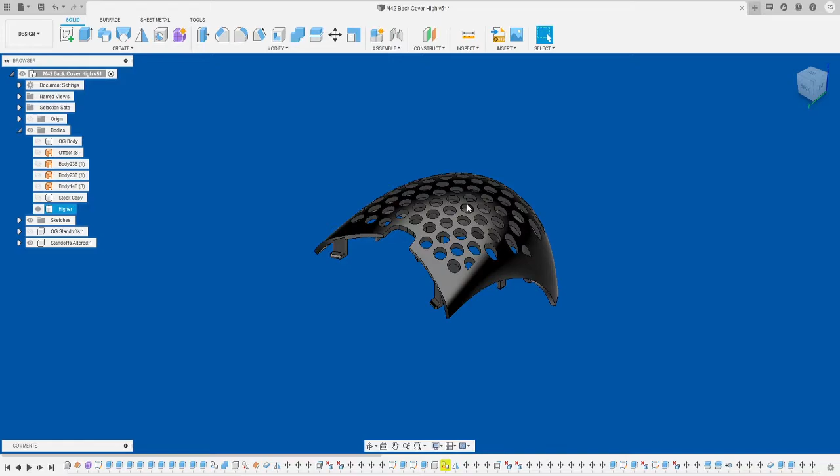All right, so I'm gonna do a quick voiceover about this altered M42 back cover file. See, the original looks like this - this is what the company gives you. This is for the higher one because I don't see a point to doing it to the lower one.

What's this? Okay, I don't know why that's there. It's like an artifact, weird. Whatever, ignore that.

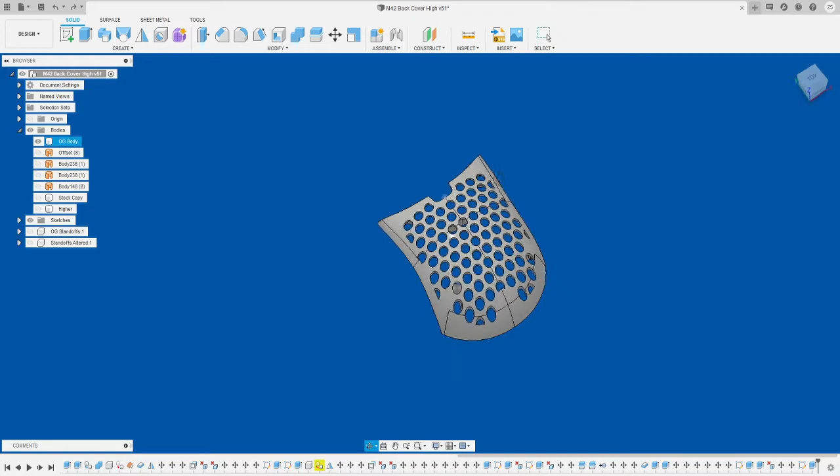Basically, I'm gonna leave these extra bodies in here in case they're useful. But I took the original file and attempted to make my own stock back that's pretty close, using form, obviously. You can find it by editing the form here, then it's body 11. I'm just going to leave it in here, even if you don't want to copy the exact back one, because why would you?

This is for solid. You can obviously put holes in it. You should find them as a hidden sketch here. I think I'll enable them, speed holes or something. Oh no, I didn't - here, we'll do speed holes.

So that way, if you want to take those out, they should only take out like a gram or, I don't know, maybe like 2, depending on how thick you make it.

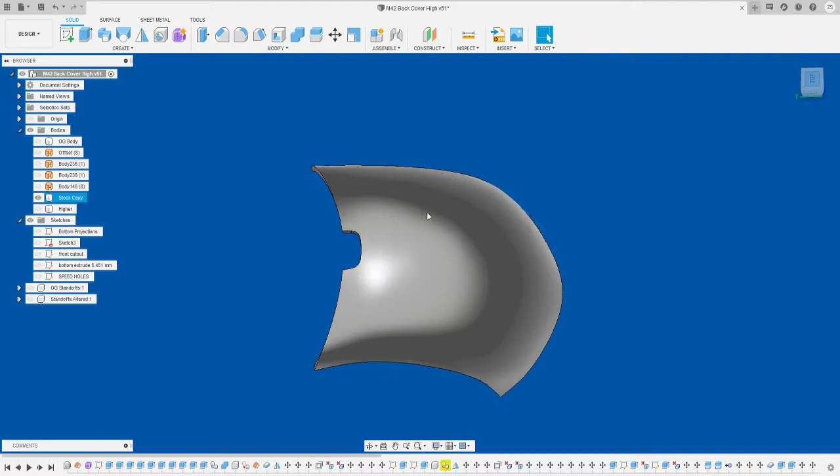But yeah, I just wanted an alteration to kind of give it a bigger butt. So like this, kind of not exactly like a ZA or something, but something more in that vein. You can see the original here to compare.

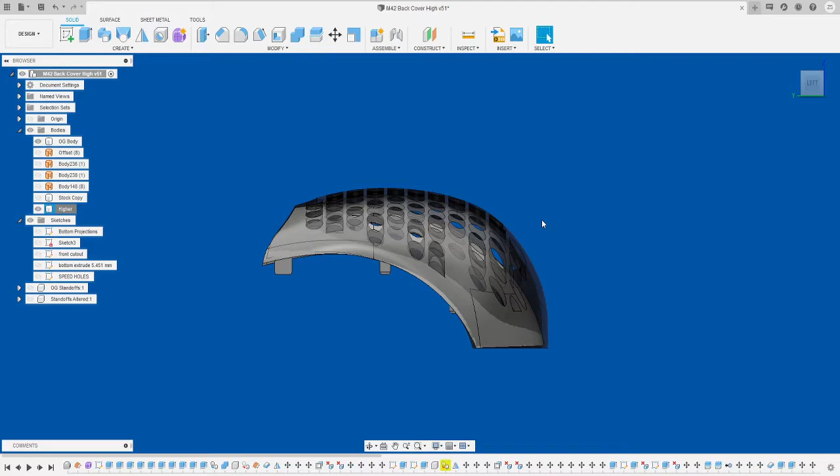So this opacity, can I set it here? Here, come on. There we go. So you can see it juts out a bit more at the back here.

That way you can just play with it a bit more. If you want to make my actual change, just go like this, hide body 12, and just start playing with it. I don't know, maybe you want to make it really tall. Obviously not quite like this, but you can always do that.

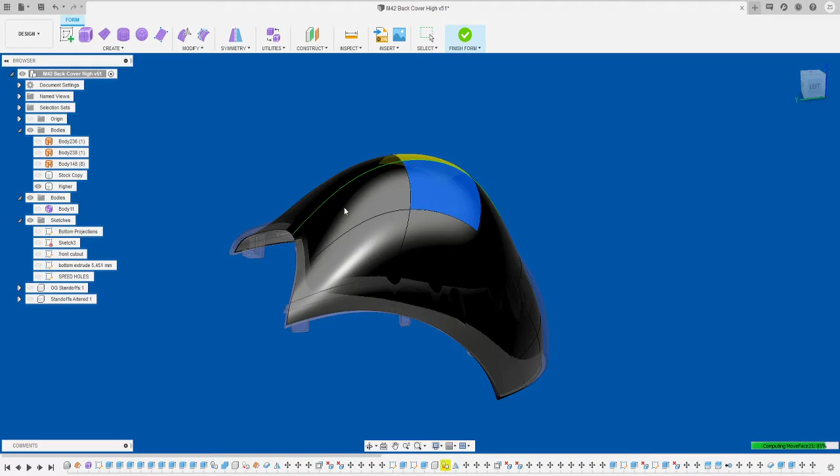And then just hit finish form and make sure it doesn't yell at you about any intersecting bodies or something, or vertices or whatever the folding stuff.

And this warning is gonna stay. I tried to go through and clear this, but I don't know - at some point I pasted something and I don't know. There's an error, but it all works fine. And when I delete it, something bad happens. Pretty sure.

I'm probably gonna skip ahead so you don't have to wait for this to compute. Or not, we'll see how long this takes.

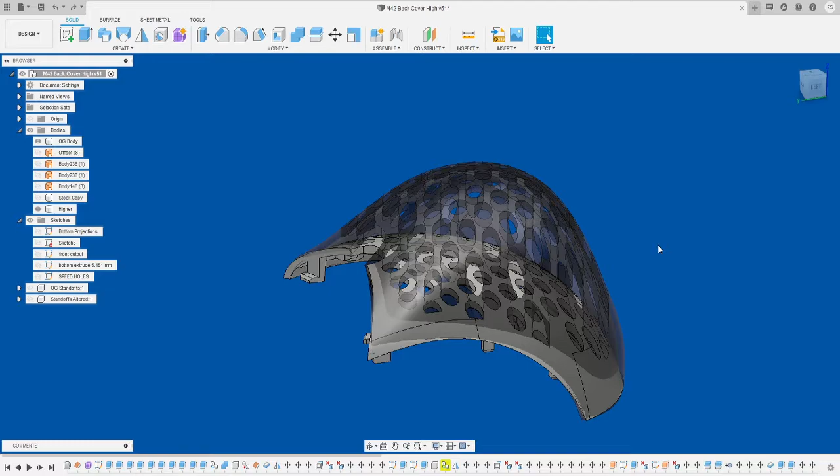Yeah, see, deletion causes downstream failures. So I'm just gonna leave that there. Obviously I don't have the tightest workflow of all time or anything, but a backup makes this not derp. But yeah, it could be useful to you.

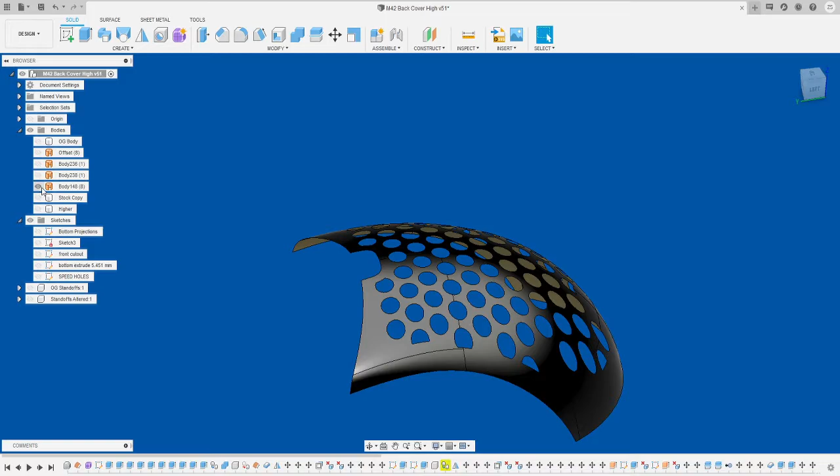So the way I have it separated is for the original bodies. I have the original body, obviously, OG body. Got this offset, which is just a surface offset here. I don't think it actually ended up being useful for me, but if you want that body to work with, it's there. And I just had a couple of previous shapes that, I don't know, I wasn't really happy with. Another one of these offsets.

This is the one that's pretty close to the stock one. Obviously, it's going to differ a little because I couldn't 100% copy the geometry. That's my shape, which has holes in it. If you want to get rid of those holes, look for speed holes down here and then suppress it. And then you can print this solid if you want.

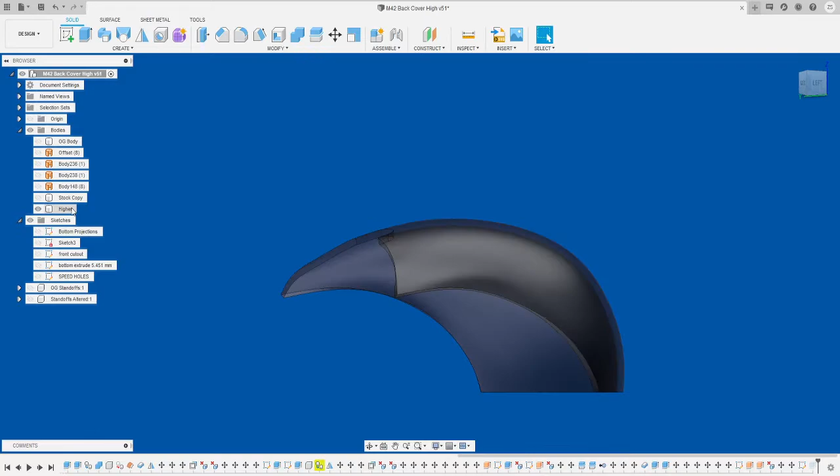I'm going to restore this opacity. Otherwise, I've got some of these projections here for when I was making, or not making, but like copying over the standoffs. I don't think these are that useful, these sketches.

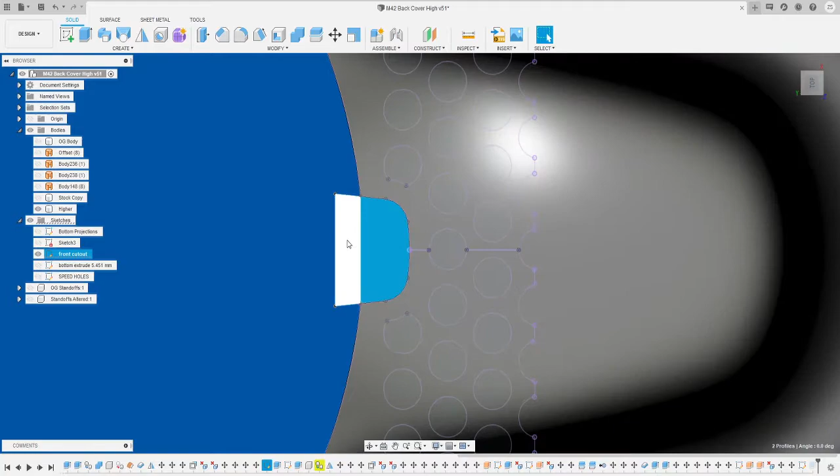You'll want to do this front cutout one here. You'll want to have this part extruded up, and then I have it going a bit in front just in case you design a shape that actually comes forward just a little. You'll want to cut that out because otherwise, if there's something here, you can't place it in the mouse. Bottom extrude, yeah, so go from here and then extrude up 5.451 millimeters as it says.

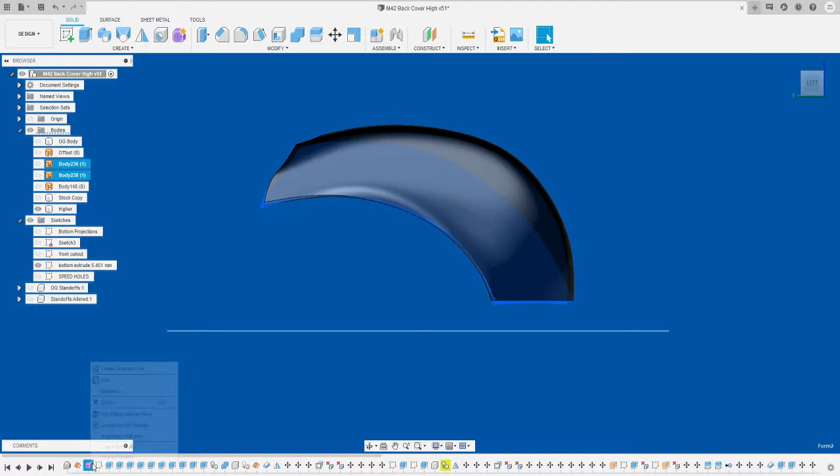And that's how you get the right height at the bottom, because you don't necessarily have to design your form in such a fashion that it's square. Like here, just go like this. Hide this, you'll see I have a curve down here - it actually goes down below where the body actually is. That's fine, just do a bottom extrude up, and then you can get the regular height. Or you can play around with the height if you want, obviously, but more power to you.

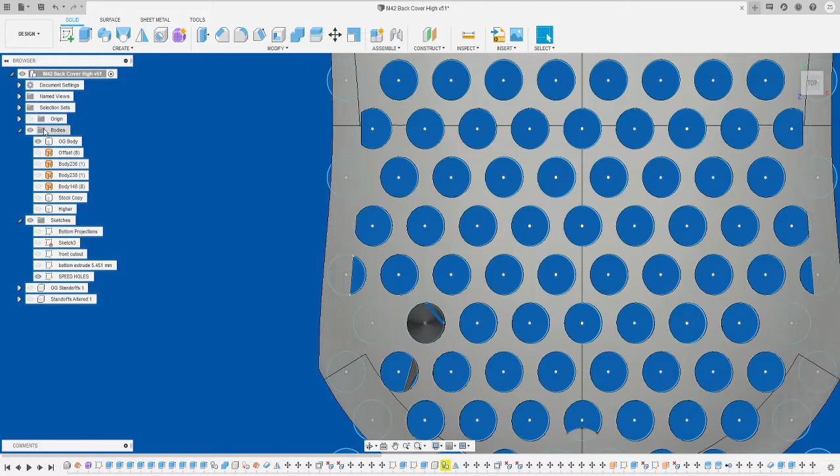These are just the holes if you want - I just copied their stock holes. If you see, let me hide this - you'll notice it's actually a little bit off. I think this file's not centered, like when they give it to us it's slightly off center, or asymmetric in the way that the left is like 0.1 or 2 millimeters bigger or something. So what I do is I just started with the center one and then build out from there. But obviously you can make them whatever shape you want.

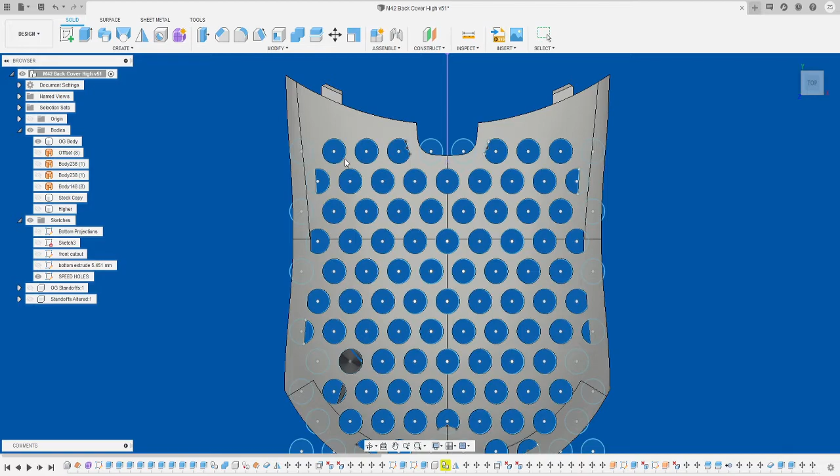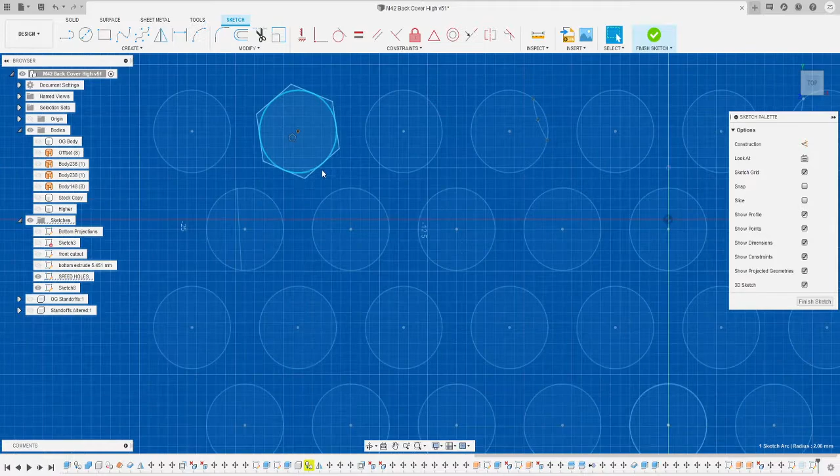You should do something like make a polygon here, like this. So you want to create like a 5-sider or something, 6-sider here. It's a 6-sider, you can't see. And then just rectangular pattern across, and then make a new one on this row, and then do it across, and then do each one down alternating. Like you would end up doing it like this. Obviously the direction is going to be a little messed up here because I didn't make it perpendicular.

But what I mean is go like this, skip this row - that way you can just keep the alignment the same. Or do it however you want. You could do a circle one here and then just revolve out or something. But yeah, that's if you don't want circles. If you want octagons, or I don't know, you can put your name in it or something.

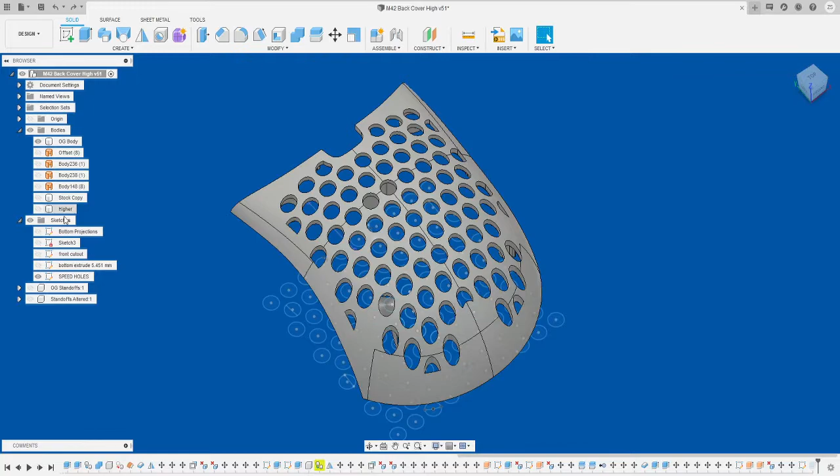Otherwise, I have the original standoffs - these are hidden, but this is where all of the originally modeled standoffs are, just in case you want to work with them. I altered them because they had to go a little taller, otherwise they're not going to connect to the bigger hump. The one thing to note here is there's a difference between...

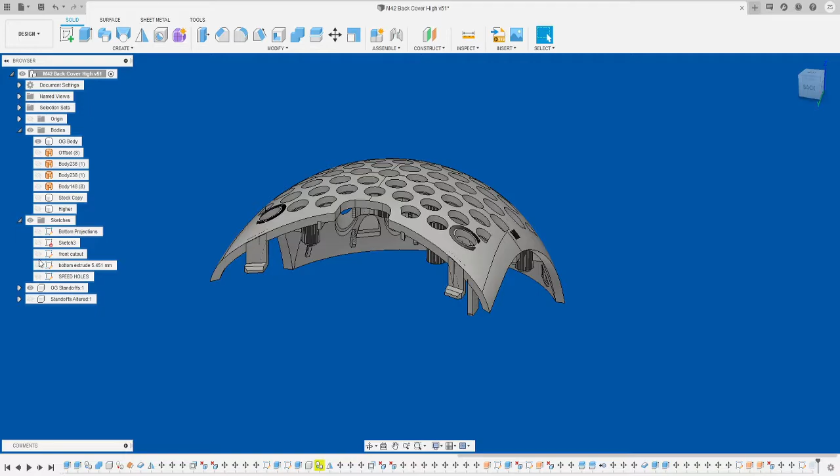Here, I'm going to enable this one, hide these. This left bit right here, which is on the file, this isn't in the real life base plate. For whatever reason, it's basically turned 90 degrees. If you were to take this and then rotate it 90 degrees, instead of like this, it's closer to this in real life.

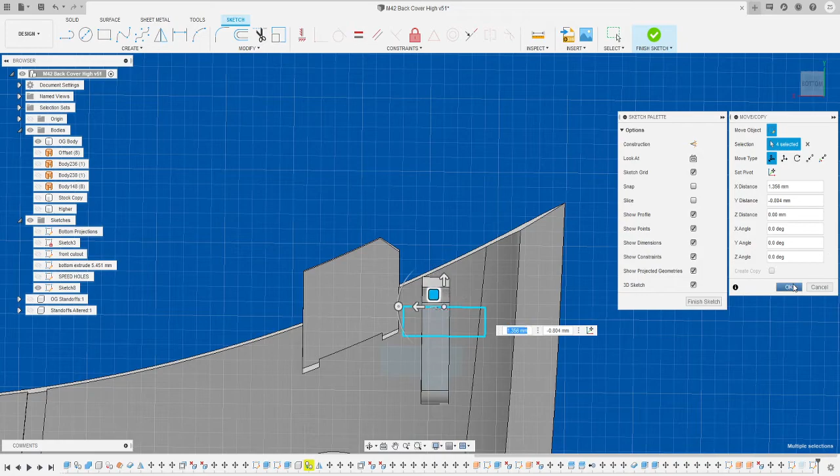It's obviously not the exact positioning, but it's something like that. But it doesn't really matter, you don't need it, so I don't know, it's just like a minor error. So for mine, you'll see that I actually don't have that modeled for my standoff copy.

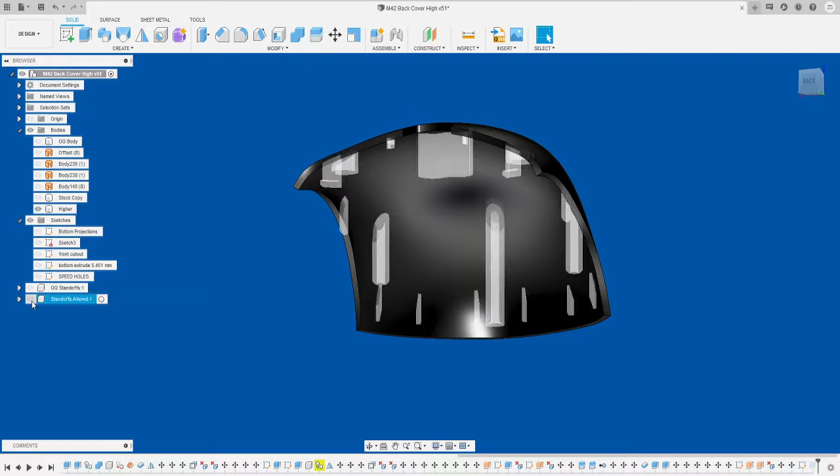But yeah, as you can see, this is just another copy of them. You could use the originals if you want, then just make sure you bring up, because otherwise you're going to have issues where you go like this. I'm going to activate the extrude - see how I go up and see how it's joining now? Here, if you can tell better from this angle, look at this gap right here.

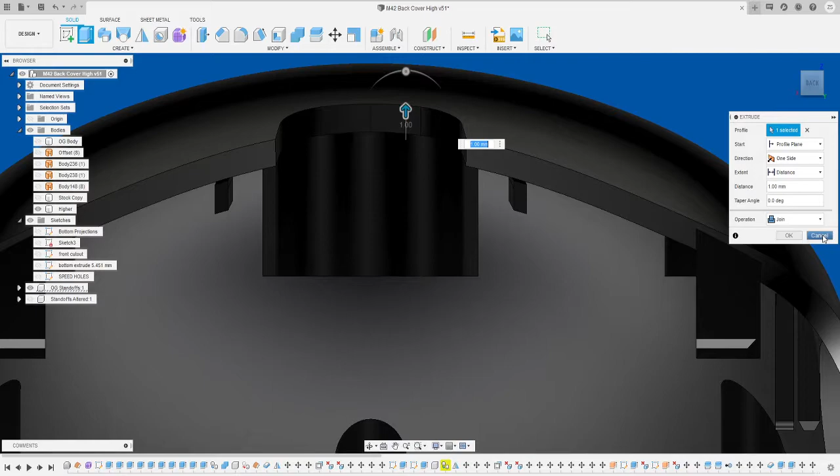You have to go up and join it up so there's no gap. But I'm obviously giving you the file in such a way that you can change the form. So I want you to be able to alter these without having to make them lower or something - you just have both to work from.

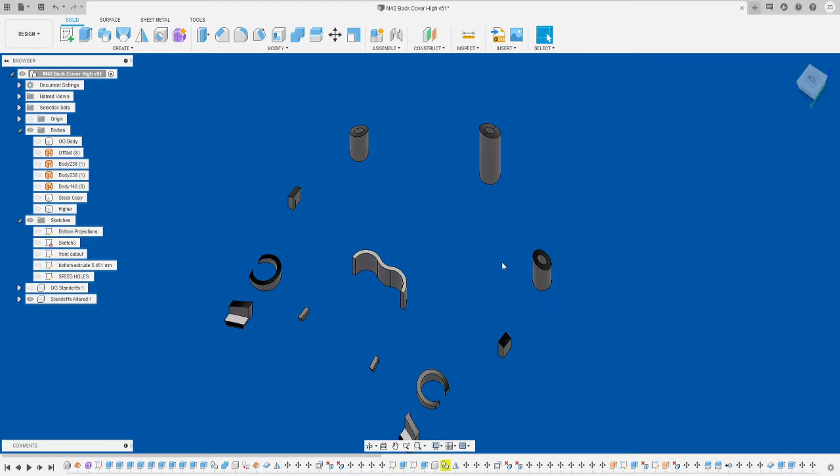And I think I removed the ribbings - yeah, these little ribbings right here, because they're like for PLA, I don't know, they're not that good. They're just like little random things. You can design it however you want, obviously. But yeah, just wanted to give you a quick overview - probably longer than it needs to be, but that's how you use this file.